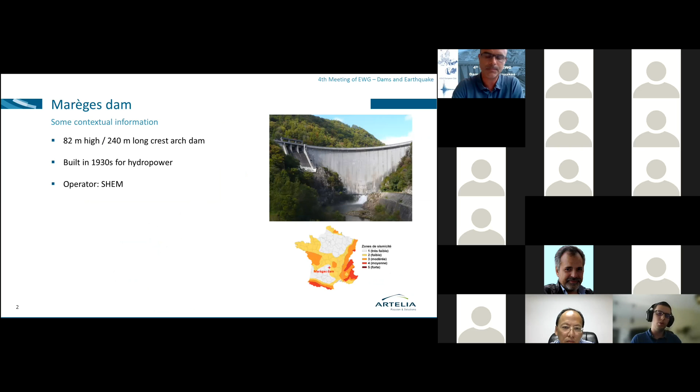We will talk in this presentation about the spillway gantry that you can see on the photography. Based on a previous study carried out in '99, the acceleration was about 0.6 G at the base of the gantry, and the model leads to an amplification of the PGA by a factor of 5.7. Based on those results, the SEE load case was designing, and a strengthening of the spillway gantry was required.

But looking at the seismicity map of France, the Marèges Dam is located in the weakest area of seismicity. So a question was raised regarding the assumptions considered for the calculation. Prior to strengthening, Artelia carried out an advanced numerical modeling in order to reassess the amplification at this location with other assumptions.

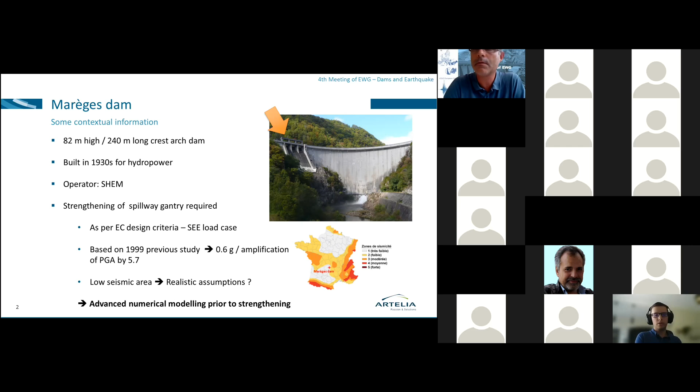Just a quick close-up view of the spillway and the spillway gantry. As you can see, the spillway gantry is not located directly on the rock mass, so there can be a bit of amplification through the spillway.

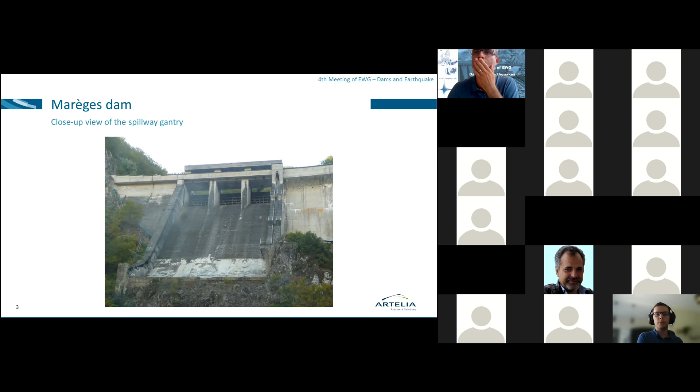So let's talk about the seismic input. Prior to the calculation, seismic hazard assessment was carried out. In order to avoid questions from Pierre-Yves, this was carried out by a deterministic approach that was not of our choosing. So that was an input for the calculation.

The PGA is very low, about 0.10 G for both horizontal and vertical components. For information, this is higher than what was requested as per the previous working group on dams and earthquakes, which was a national one commissioned by the government.

We carried out time history calculation, so we generated 3 sets of synthetic accelerograms for both horizontal and vertical components. You can see an example on the left corner of one accelerogram, set one number 1, and on the right corner you can see the spectrum of those accelerograms fitting the site spectrum.

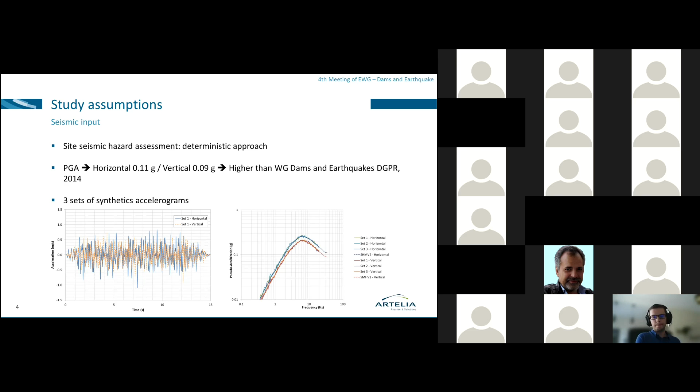A few informations regarding the foundation. The Marèges Dam is located on a granitic foundation. The mechanical properties of the entire numerical model were based on the previous calculation, which was calibrated on the monitoring data. In order to assess the dynamic properties, the ratios illustrated were used, meaning the dynamic rock properties were multiplied by 1.5 relative to the static ones, and for the concrete it's multiplied by 1.25.

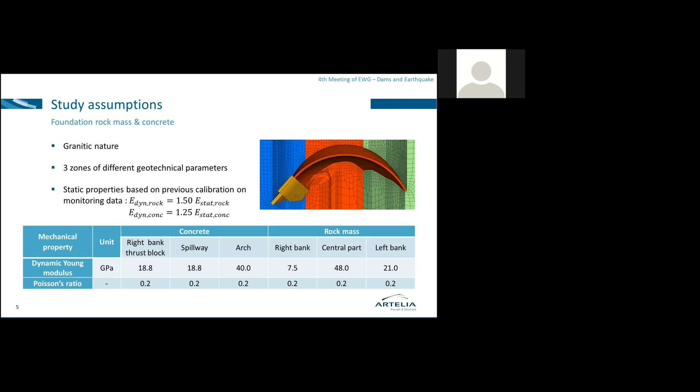There are 3 zones of different geotechnical parameters in the model that influence the seismic response. As you can see on the right bank, the blue part is not that stiff, with a modulus of 7.5, whereas on the central part there is a dynamic modulus of almost 50 gigapascal.

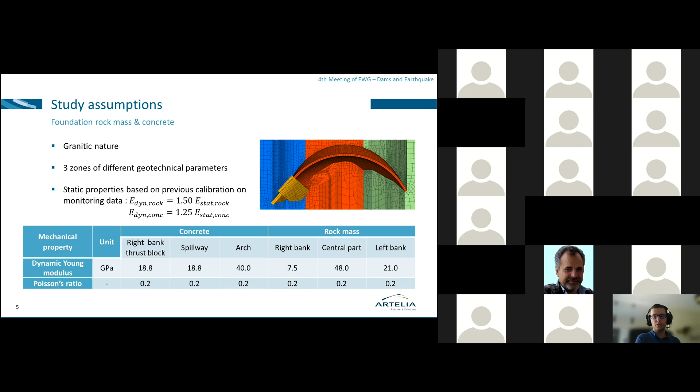The numerical model was carried out by means of Flac3D code, developed by Itasca. You can see the model on the right part of the slide. The mass of the foundation is considered through the calculation, so the wave propagation is solved all along the foundation, and the mesh of the model was selected in order to solve frequencies up to 20 Hertz.

Due to the difference of stiffness, you can see there is a difference in the meshing according to the zones of the foundation. The model is composed of almost 175,000 hexa-dominant elements, with a mathematical formulation using a mixed discretization scheme in order to avoid shear and volumetric locking of the zones.

Every element of the model is modeled by means of the same elements, for the three parts: the dam, the reservoir, which is modeled, and the foundation. The same elements are used for all three of them.

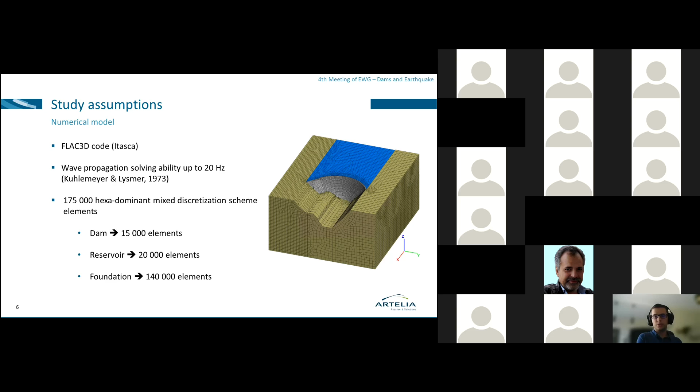We also consider the four advanced dynamic interaction features that were also explained in further studies in the previous study, such as the Tagokura Dam. We considered the input applied at the base of the model was calibrated in order to obtain at the outcrop illustrated in red, which is in the free field, to obtain the site spectrum.

Radiative boundary conditions were considered in order to model a nearly semi-infinite foundation continuum, which has such features as a significant influence on the model seismic response, with a decrease ratio up to 2 or 3.

The reservoir was modeled by means of compressible solid zones, which is quite different from the Westergaard hypothesis. Doing so, the reservoir may either behave as Westergaard, which is only one particular solution of the wave propagation, or may also generate additional damping, depending on the ratio of the eigenfrequencies of the dam and that of the reservoir. It depends on the model and the geometric component.

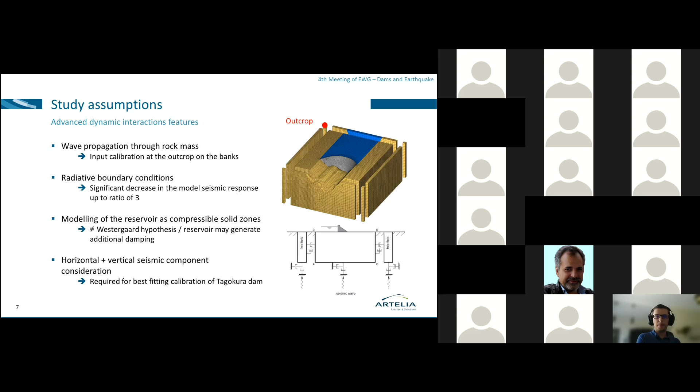The entire calculation was elastic, which means there is no energy dissipation through the materials, nor at the interface between, for example, the joints of the dam or the interface between the dam and the foundation. This is a conservative approach. Consequently, it will maximize the amplification at the gantry of the spillway.

The Rayleigh viscous damping was considered only for the concrete, and it was based on the range of the eigenfrequencies of the model from the previous study. The magnitude of the Rayleigh viscous damping is about 4 to 5% in the area of interest.

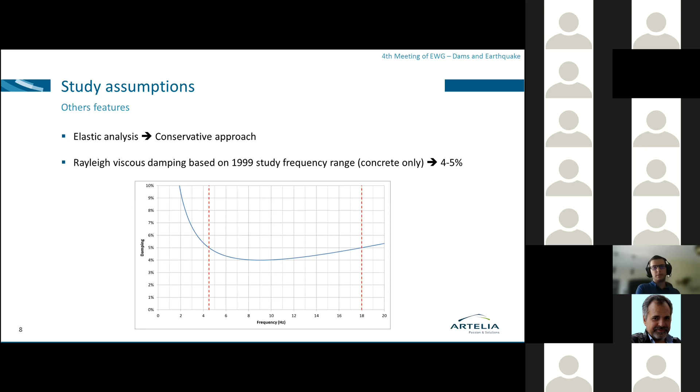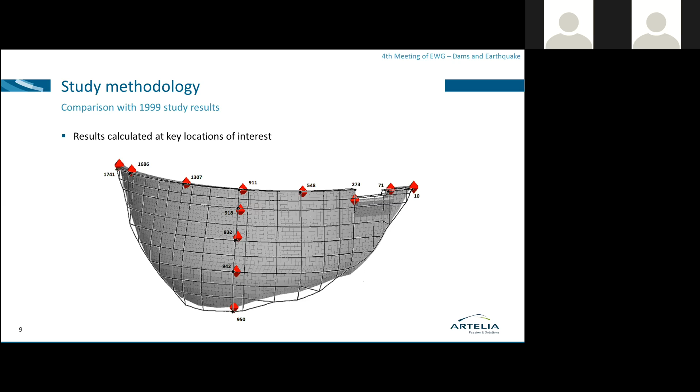In order to compare our result and make a check with the previous study, we monitored the result at key locations of interest that you can see in red, and on the figure you can see the previous numerical model superimposed with the one that we carried out. In this particular analysis, we will focus on the points on the right bank, number 273 and 71, which are where the gantry of the spillway is located.

Talking about amplification, we assess the amplification through the model by means of the following methodology: we consider the input applied at the bottom of the model, we assess the corresponding spectrum, and we also monitor the acceleration at the key locations as explained on the previous slide, and assess the corresponding spectrum. What we call amplification is the high frequency ratio of both spectra.

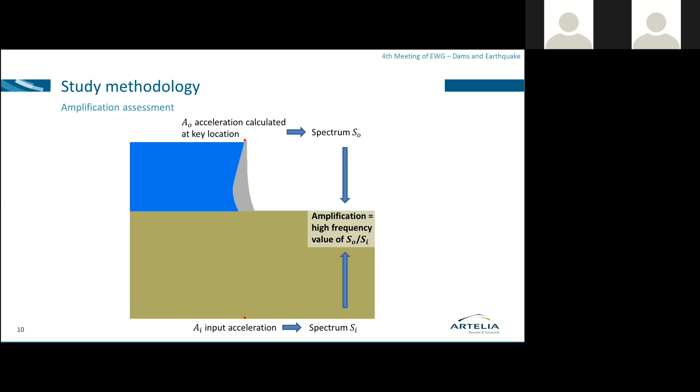Regarding the previous calculation, we had several issues regarding the horizontal seismic component direction. In the previous modeling, both horizontal bank-to-bank and upstream-to-downstream components were simultaneously applied, corresponding to the same seismic solicitation. This leads to an overestimation of the horizontal seismic component, which in this case is multiplied by a ratio of square root of 2.

This is also questionable because, for example, in this particular load case, even if the signals are oscillating from right bank to left bank and upstream to downstream, it leads to a very stiff behavior of the dam on the left bank due to the rock support, which increases its stiffness, and a more unfavorable response on the right bank, which is the key location of interest.

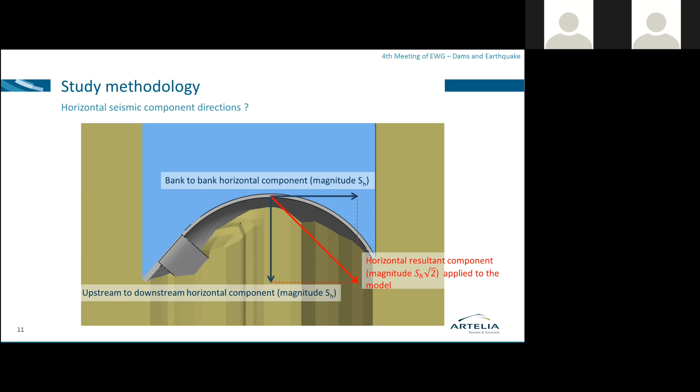So we did carry out this calculation as per the previous assumptions, but we also carried out two additional load cases, considering either the horizontal component applied only radially, which is the most unfavorable and will lead to the most amplification at the location of interest.

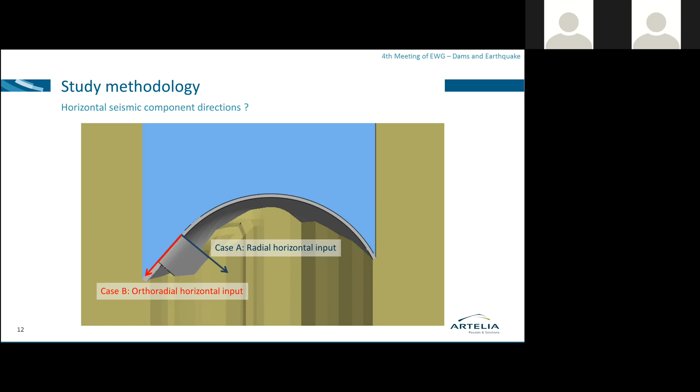And the other one was to consider an orthoradial horizontal input, which in this case is very favorable regarding the amplification. Our job was to provide this information, this amplification; structural calculations were not our part, so the structural calculator can do the Newmark combination as well.

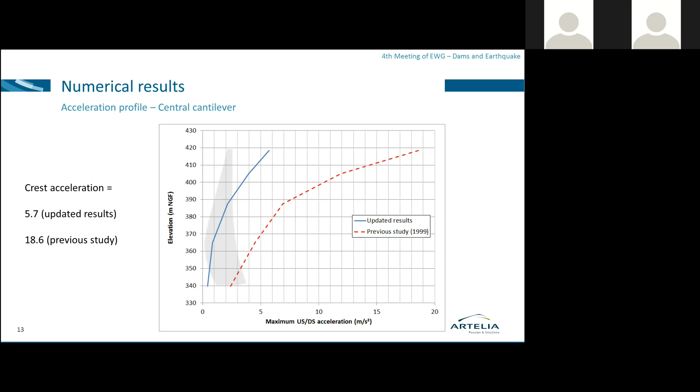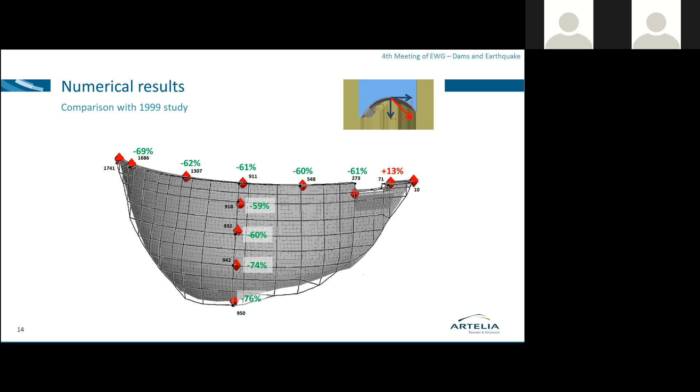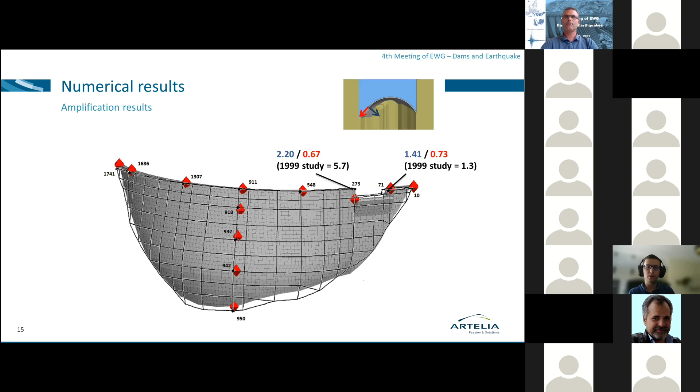Now, if we carry out the calculation as per our methodology, in blue is the result for radial solicitation, and in red as per orthoradial, which minimizes the amplification. As we can see, we have a significant decrease of the amplification at the key location of the gantry of the spillway. Previously we had 5.7 in the 99 study, and now we have a maximum of 2.2 on the left part of the gantry. The results are almost similar on the right extremity.

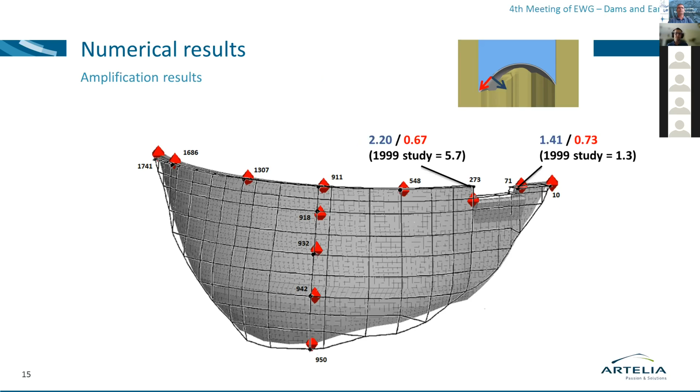So, to conclude for this study, the strengthening of the gantry crane was avoided due to the reduction of the amplification. In the previous study, we had seen that with advanced features, an acceleration decrease with a ratio of about 2 to 3 was expected, and this is confirmed with this study also.

There is a question regarding the orientation of the horizontal component for an arch dam, because in our case the orientation was quite obvious, since we were only interested in the acceleration and amplification at one location. But if we want to assess the overall seismic behavior of the arch dam, the question can be raised. If you look at the two comparisons on screen, for example a combination considering one component in red and the other in yellow, the behavior of the dam will not be the same depending on what is shown on the left side versus the right side. It depends on the location of interest of the dam.

With classical calculation methods, the seismic response is often overestimated, and there is a risk of unnecessary strengthening. As we have seen, with advanced calculation methods and features there is a lower seismic response. But the question is: is it really necessary to carry out such costly calculations in order to assess the seismicity of such a structure, for example with a PGA of about 0.1 G?

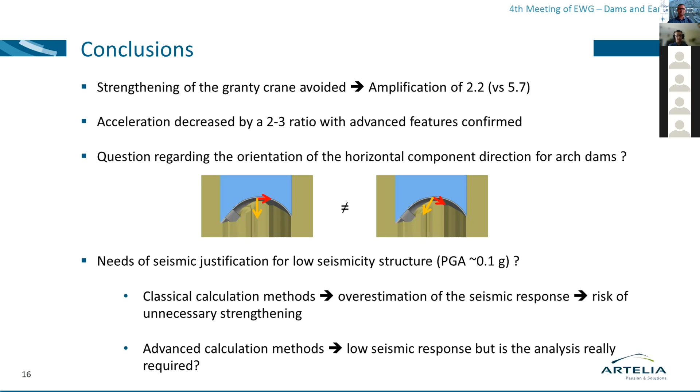One calculation that is usually required is, for example, not for dams but for powerhouses. In such cases, it is often requested by the electromechanical supplier to assess the amplification through the powerhouse. As we can see in this figure, applying 0.16 G at the base of the model leads to almost 1 G at the top of the model, and this can lead to very significant issues regarding electromechanical equipment.

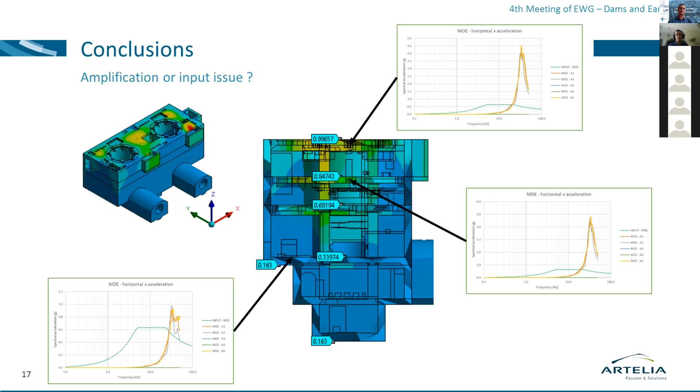The problem is maybe not an issue of the amplification through the model, but of the input that is considered. For example, in this case, this is an underground powerhouse — is it really necessary to consider 0.16 G at the base of the powerhouse, or maybe we can consider it at the outcrop of the rock foundation? So that was all for my presentation, and I'm available for any questions.